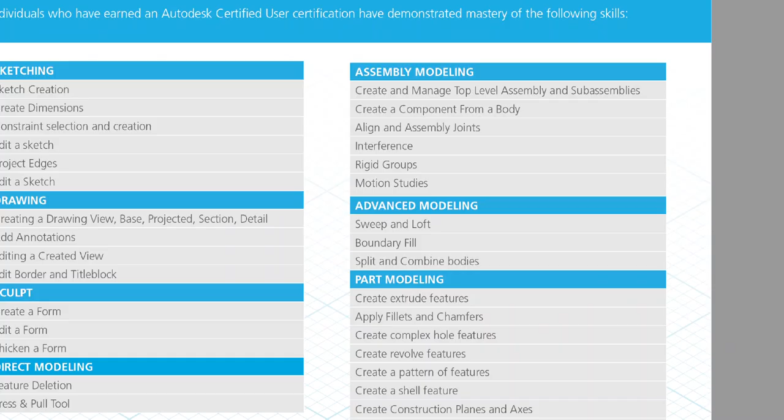Hey everyone, another video spotlighting another Autodesk Certified User certification exam objective for Fusion 360. In this video, we're going to take a look at advanced modeling, specifically splitting and combining bodies. This is going to be a real quick and short video, as these are very simple modification tools to use when creating 3D models.

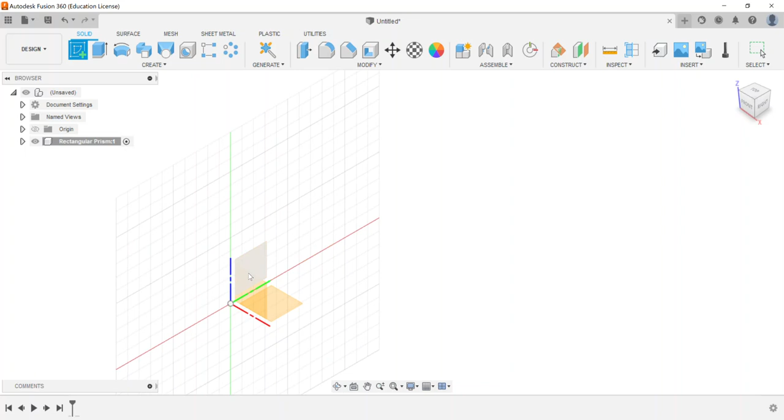So I'm going to go ahead and move into Fusion and do something really basic here. I'll create a new component and call this a rectangular prism. We're going to create a sketch. I'm on the front work plane, and I'm just going to draw a rectangle—it doesn't really matter the size. We'll go 4x5, how about that.

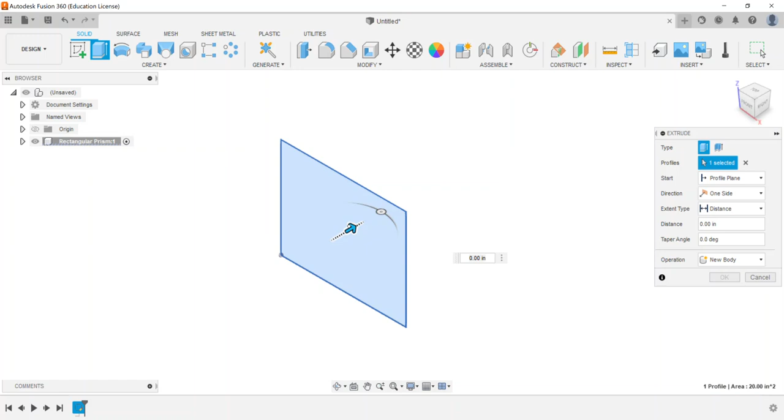This way we get something constrained. So finish the sketch, and I'm going to extrude this out. Let's do 10 inches. Again, you can do this with a lot of different models and practice with this.

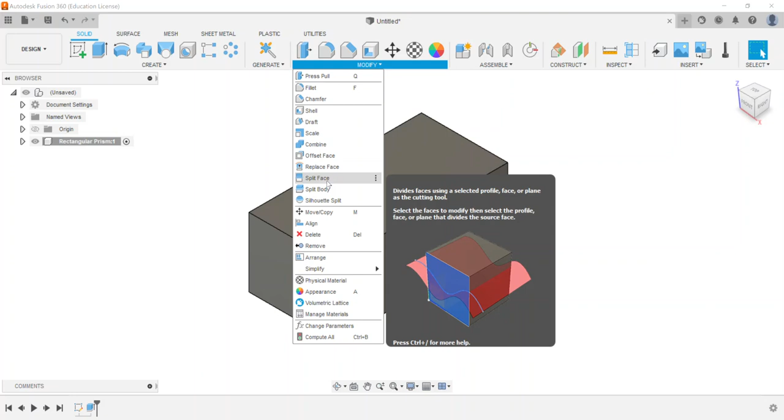But here is one thing we can do with this particular item. If I go to modify, I've got a few options. I'm going to show you how to do splitting a face, but also splitting a body, and then doing combine a body as well. You can even see from the tooltips what they're used for, as well as splitting bodies and things like that.

So here's kind of what I've used in the past. I'm going to go ahead and create an offset work plane, and I'll base it off of this front plane, putting it right in the middle at 5 inches.

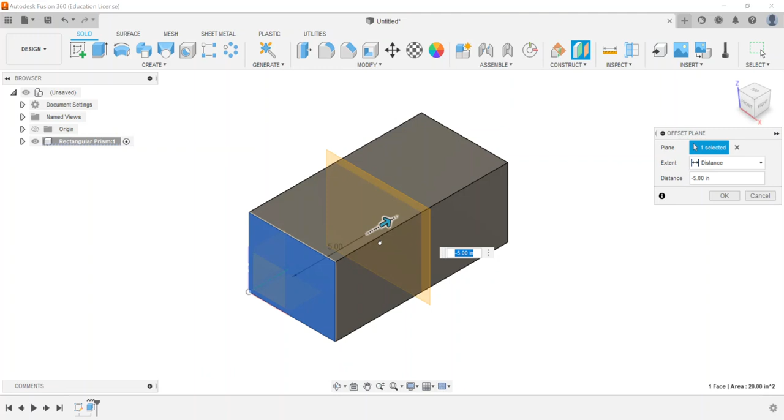Now if I want to split this—because right now in my browser I've got one body that's been created from the extrusion—maybe I want to go ahead and split this, or have a case where I need to split it into two separate bodies to be able to edit and do two different things.

So I'm going to go ahead and go to modify, then split body. The menu is looking for the body to split, so I can select the body here in the graphics area, or I can go over here to body 1, and you'll see it highlight. Then it asks what are the splitting tools.

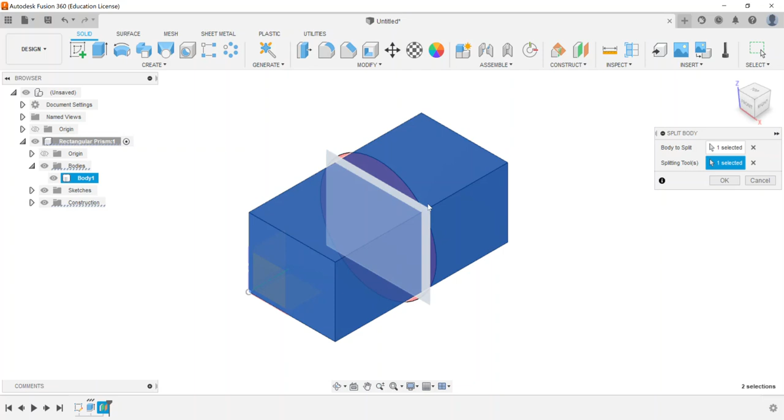Now I'm going to hit select, and I want it to split right on that work plane. You're going to see I get a red area that highlights and picks up where it's going to split. So I'm going to go ahead and say OK.

Now if I hide the construction plane and look over here, I've got body 1, which is the right side there, and then I've got body 2, which is the side closest to us.

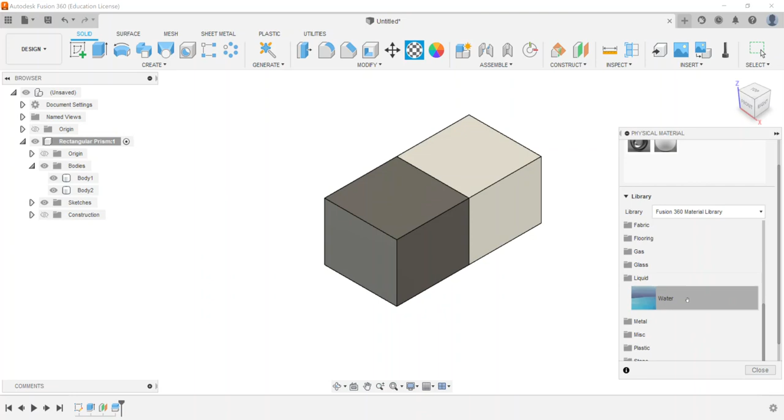Now I can do some things like, for example, go into physical material, and if I want one to be a ceramic material like porcelain, I can apply that to one body. But then, just because I had a previous video, let's say I want to make this one made of water—now those two can have two separate things. Even though they look very similar, I maybe need them to have separate physical properties, for whatever reason. So that's one thing that can happen there.

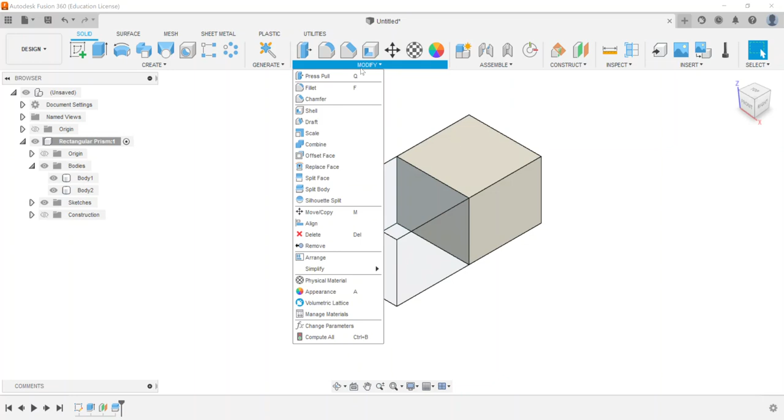Now, in order to maybe bring that back, I'm going to go to modify, then combine, so maybe I want to bring them back together. The target body is usually the one you want left, so I can choose one or the other. Then you have the tool bodies, and it automatically changes the selection. The tool body is—I'm just going to select the second one.

Either I can choose to join, cut, or intersect. I'm just going to choose to join them. If I needed to, I could create a new component, or if I wanted to create a brand new one out of that, I could check that box. I can also say keep the tools, which keeps a copy of each tool body. I'm going to go ahead and say OK.

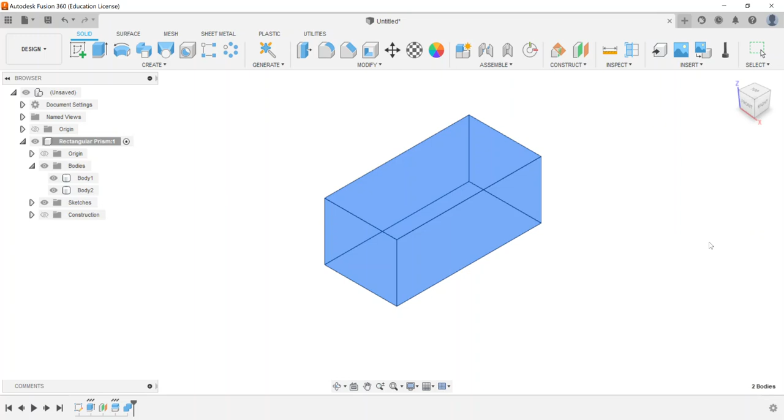Now in our combination, you're going to see body 2 is the full extent. Body 1 is the tool body that we selected, and that's what it means by keeping that. If I go back into editing the combination and uncheck that, now body 2 is the only thing that gets left, and it took over the physical material as the option. So if I need to, I can always change that back to maybe another type of material.

That's a real quick way of going through and handling combine and split. Those are for bodies. The exam objective doesn't specify that, but I will go ahead and show you this kind of scenario as well, if I create a sketch.

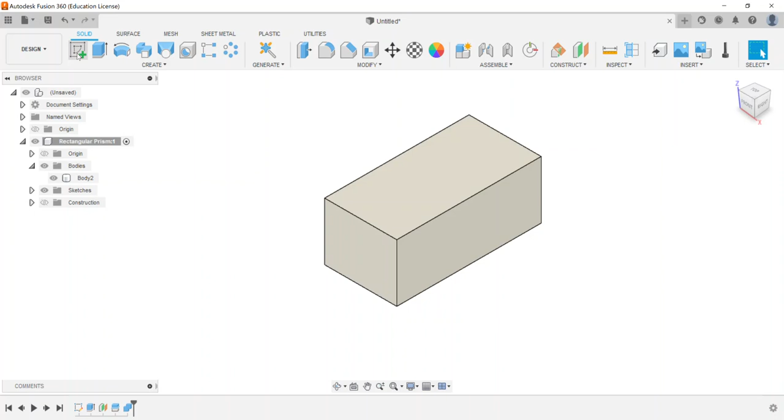Let's say I draw a fit point spline, and I'm just going to draw this kind of interesting shape here on the face. If I finish the sketch, right now I've got two separate faces that I could extrude.

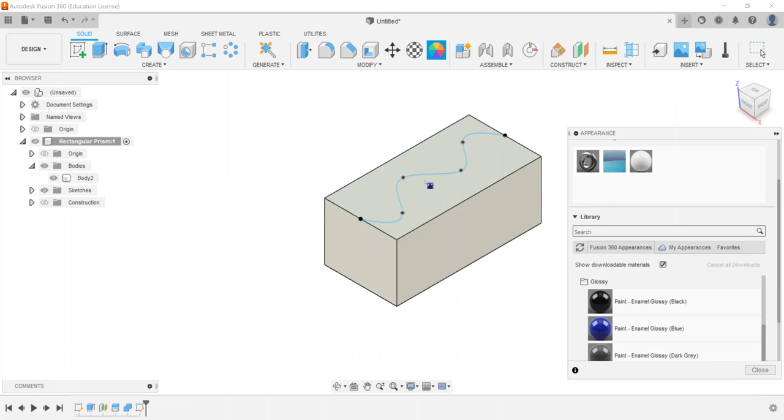As I go through and look at applying an appearance, if I try to paint this, you'll notice that it picks up the whole body, or I need to check that I got faces selected, and see if it'll pick up the separate faces. It picks up these, but it won't pick up that one. So that can be one of the issues.

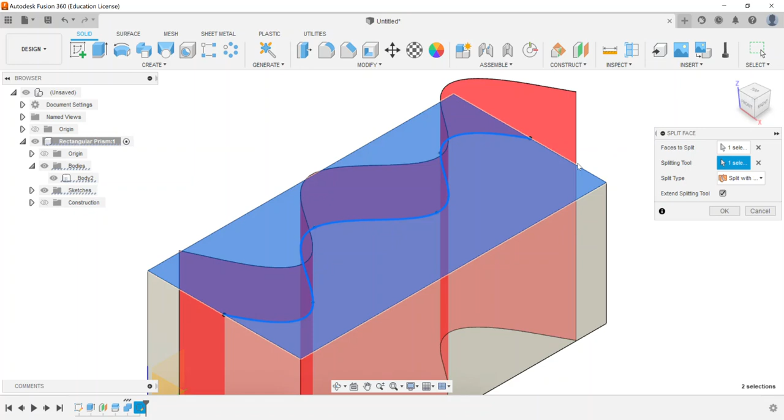So here's what I'm going to do: go to Modify and split the face. It operates in a very similar way. What's the face to split? I'm going to choose the top face. What's the splitting tool? I'll choose Select, and click on this, which will highlight when I hover over it. I'm going to choose that line, and then there's the splitting tool there.

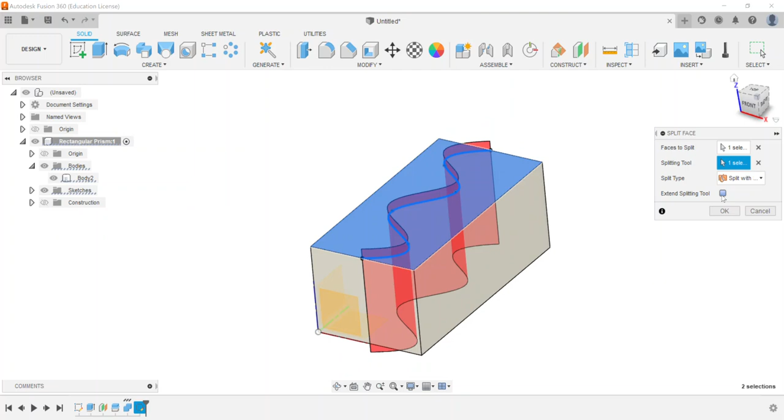It'll say split with surface, or I can choose another option. Split with surface works really well. Do I want to extend the splitting tool? It'll do that if I need a little bit more, but in this case it's not really necessary, so I can keep it right on the ends. I can go ahead and say OK.

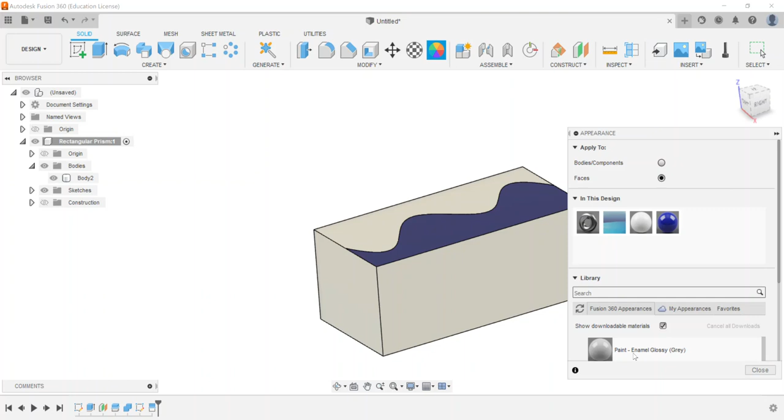Now I've got two separate faces. When I go to apply my appearance, I can look at what kind of paint color, and again I need to change them over to faces. Now I can do blue on this face, and let's say yellow on this one, and that allows me to create some new options.

So again, this is an added modification tool, but that's how to go through and do split face, split body, as well as the combine option. Utilizing sketches, but also utilizing some of the construction methods, like planes and everything, will also be useful with how to create varying models with a lot of these really cool modification tools.

So this completes the video on how to combine and split bodies.